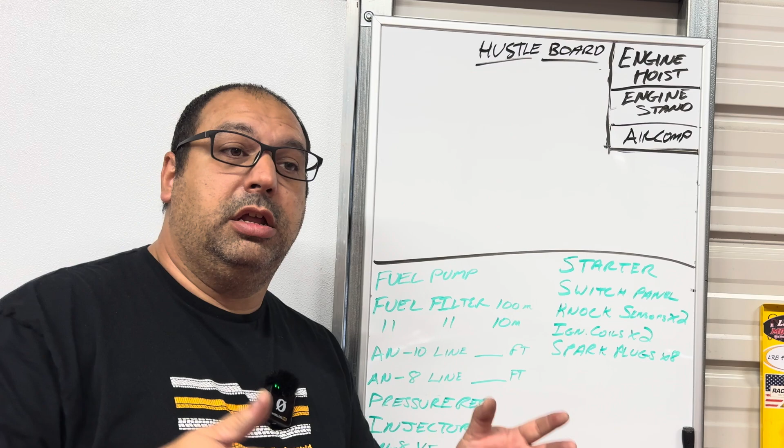I have a whole list of things I've been writing down as I go that I need to get this running. I know I need a fuel pump. I need a fuel filter before the pump and one after the pump, 100 micron and 10 micron. I don't know how much AN line I need, because I want to do -10 from the tank to the filter, and then from the filter to the pump I guess it'll be -8 just to save money, and from -8 it'll be -8 all the way up to the front.

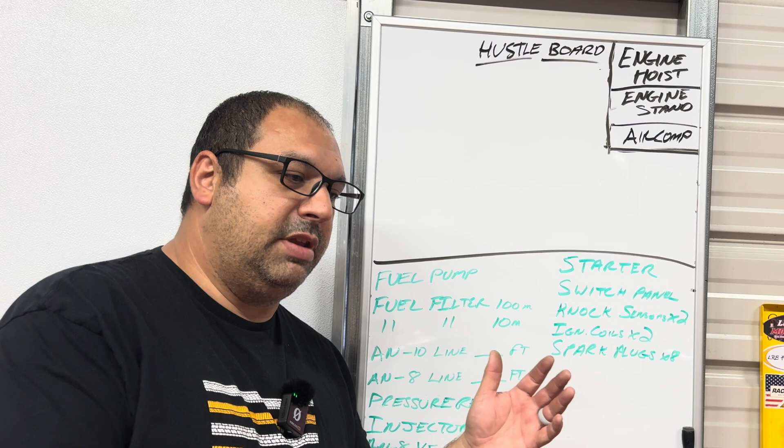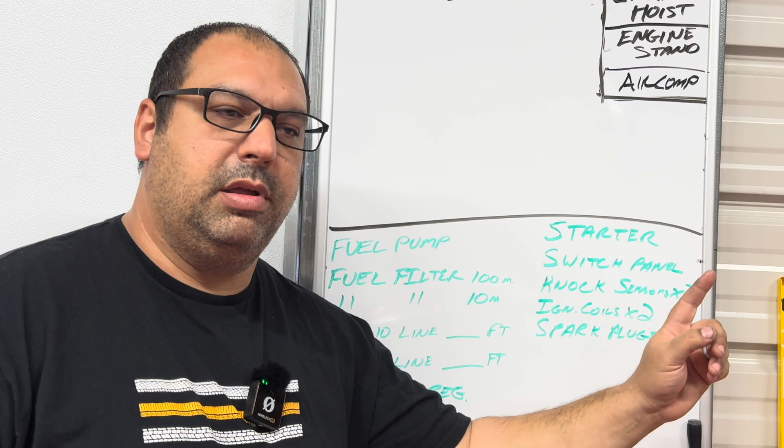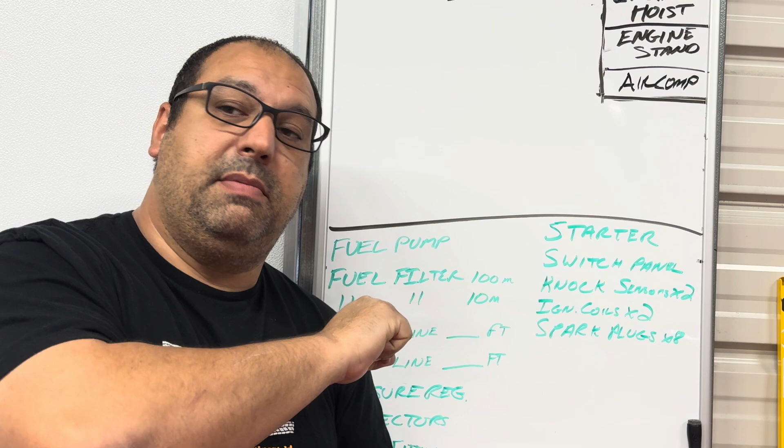The only reason why I have an AN Y fitting here is because I've looked at some of this other stuff online, and some come with fittings, some come with 90s and 45s or whatnot, but none of them come with a Y fitting. So I figured if I'm going to run fuel cell to fuel filter, 100 micron, to fuel pump, to 10 micron after the pump, and then to the regulator, I could do that 10 to 8, or I could do it all in 10. When I get to the regulator, it'll regulate like 58 PSI all the way up to the fuel rails in -8 line, so I'll do -8 from there up to the rails with the Y fitting. But from the regulator back to the tank, since I'm returning excess pressure or fuel beyond 60 or whatever, I'm going to do that in -8 as well.

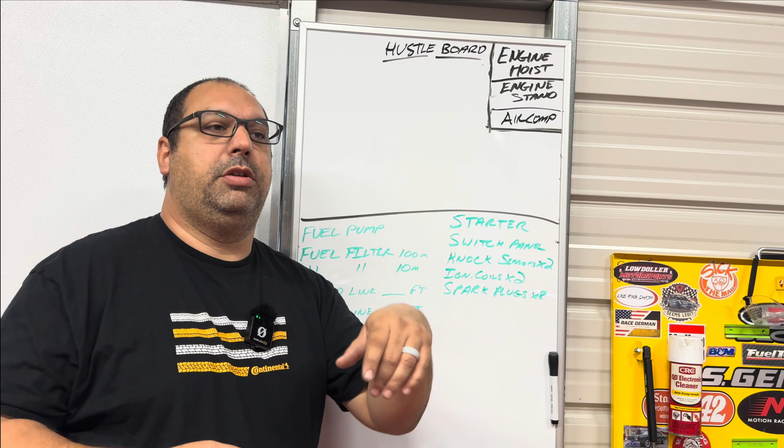Just by talking to you guys and bouncing it off somebody, I feel like I'm going to need more -8 than -10. I think what I'm going to do is take an extension cord, zip tie it up, and mock up the fuel system. But anyway, back to the list: fuel pump, fuel filters, -10, -8 fuel line.

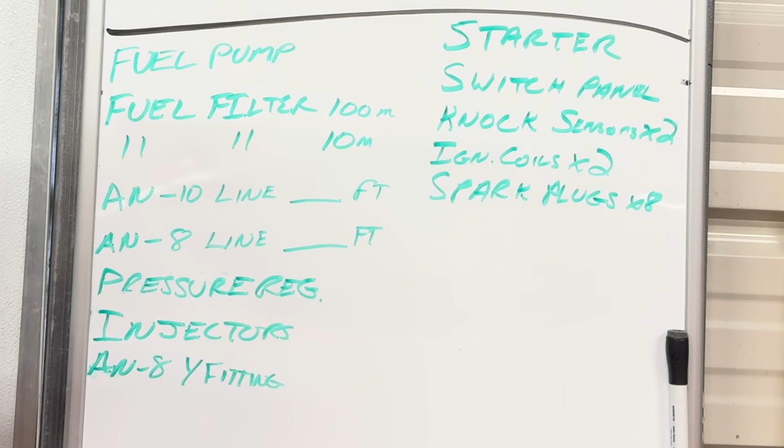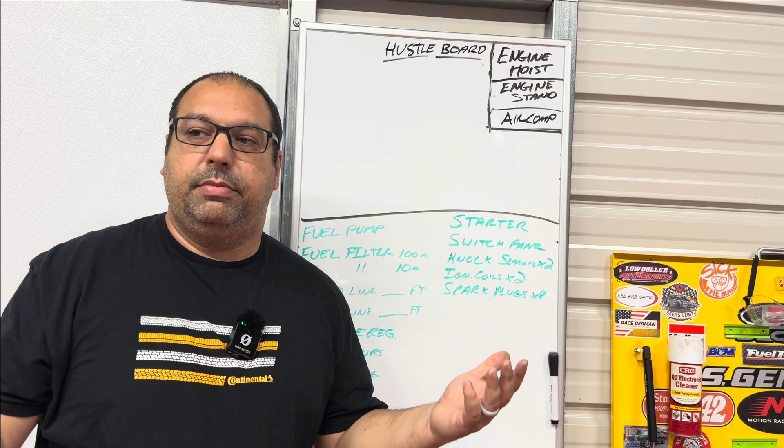I need a regulator. I need injectors because the E38 General Motors PCM that came with the Mast Motorsports LS controls kit can only run high impedance injectors, but with low impedance and the stock PCM you can't run them. So I'm going to have to get injectors.

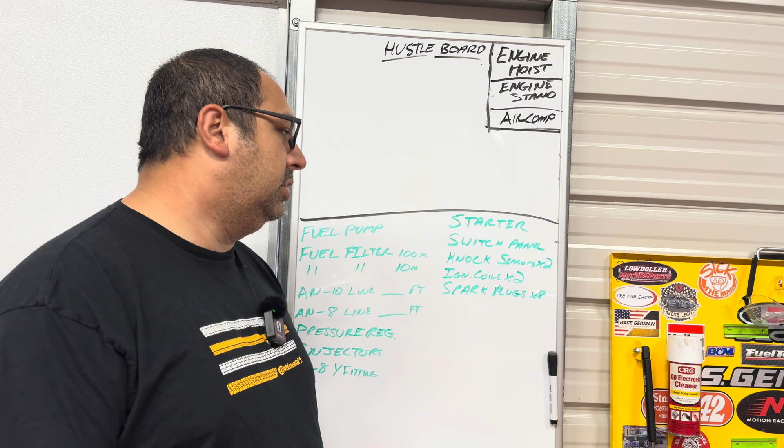I'm going to need a starter because the one I have doesn't have a solenoid on it, the starter solenoid was damaged. I need a switch panel - the ECU is going to do all the controlling and stuff, but I still want a switch panel. I need 2 knock sensors because I don't have those. I need 2 ignition coils because I have 6, you need 8, and I need 8 spark plugs. So that's all I can think of to get this thing running.

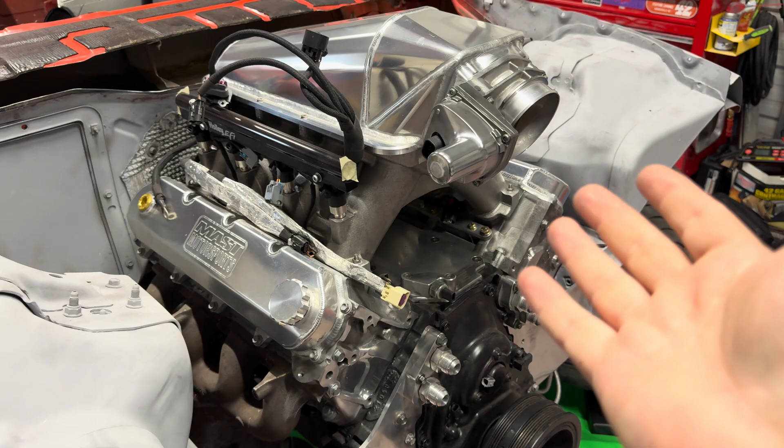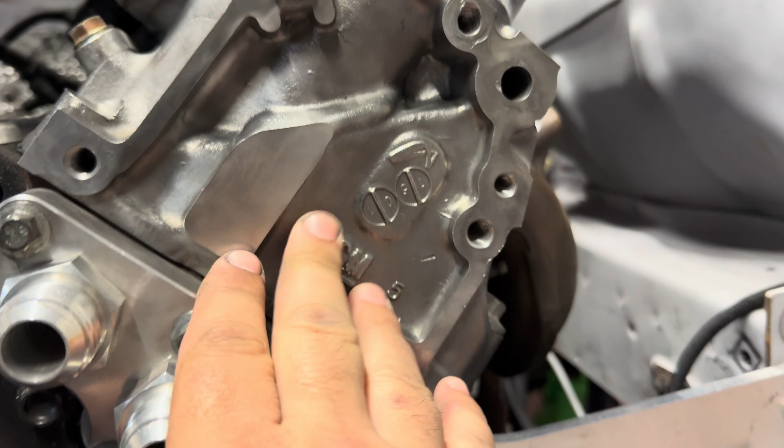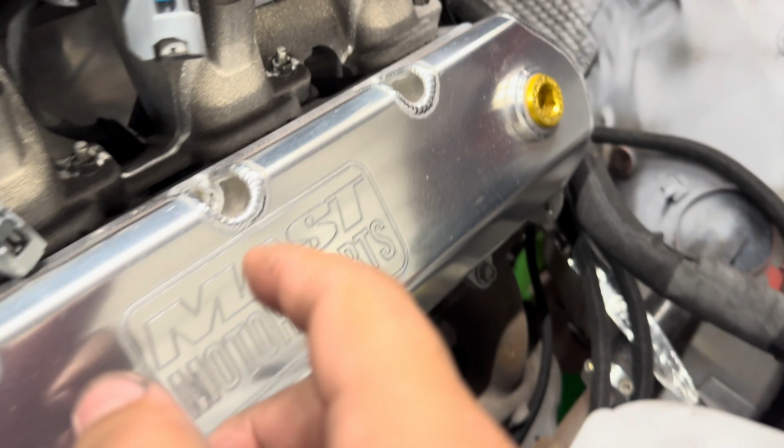As far as sensors and whatnot, I got bored the other day and got tired of the oxidized look, the aluminum was oxidized. Let me show you, it was doing that. See the little white spots everywhere? Let me see if I have another example. Yeah, the aluminum's starting to oxidize just from sitting, because like I said, there's moisture in this building.

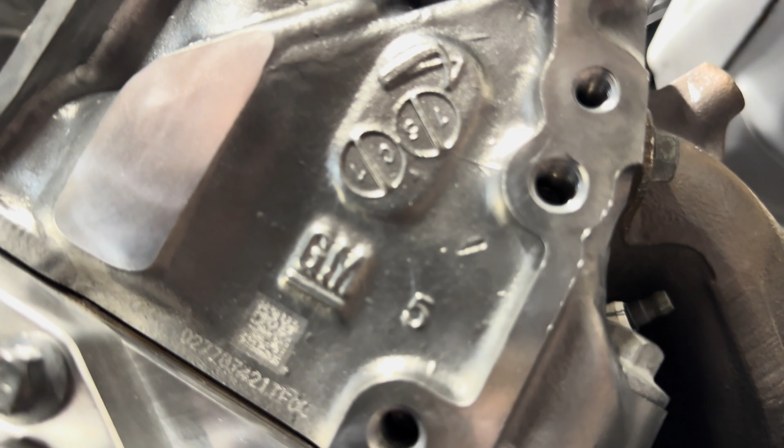So I took my time with a little Dremel and started polishing, or whatever, you see? And then I got really bored and started to polish stuff. In order to get this smooth, you have to remove all the casting dimples and stuff, and I realized quickly that takes a long time to do. With the right materials and attachments, I could do it, it would just take a long time.

So I think what I'm going to do is pause on this for now until I get bored again, and go to Harbor Freight and get a bunch of attachments for my Dremel and just blast through this. But I'd like to get at least the front of the heads the same. I don't really care about these casting marks, this weird squiggly thing, I don't know what that is. These things, I don't know what that is either.

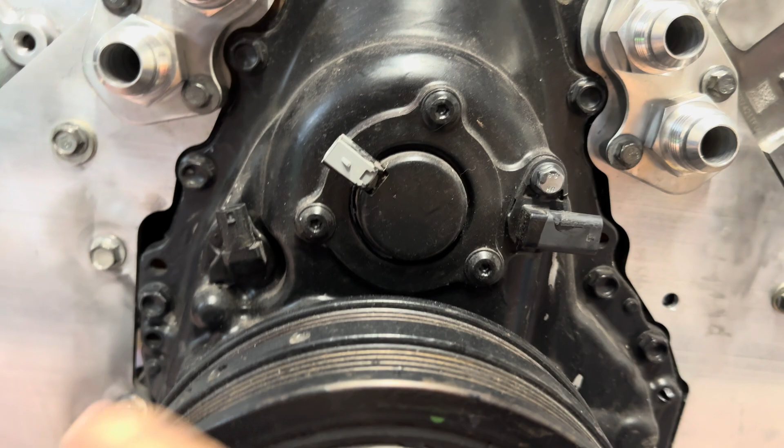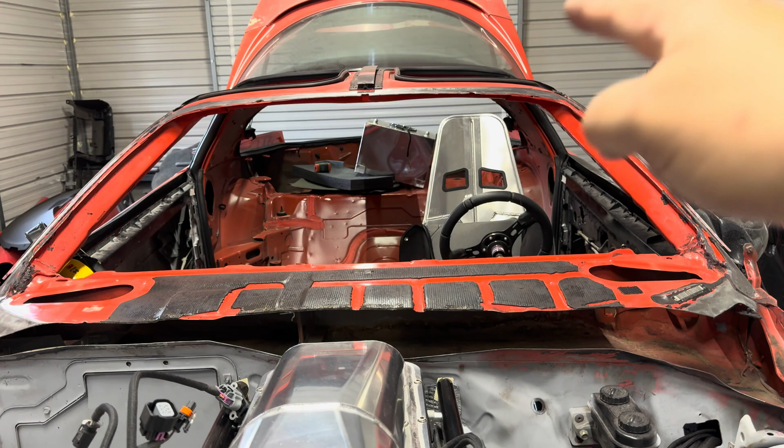I know what that is. So yeah, and then I got all the hardware cleaned up best I could. And there you go, that's what I've done. But today I have a plan for something I want to do in the back of the car with that thing, I was going to do it like this, right?

I like the height of it or whatnot, but honestly, I don't like this setup the way it is, simply because I bought these brackets, and if you go to mount these brackets, I have nothing smooth to bolt to. Nothing at all. Instead of doing all that and having the fuel cell way high up here and having to figure out how to build some kind of bulkhead, I am gonna cut the tub out.

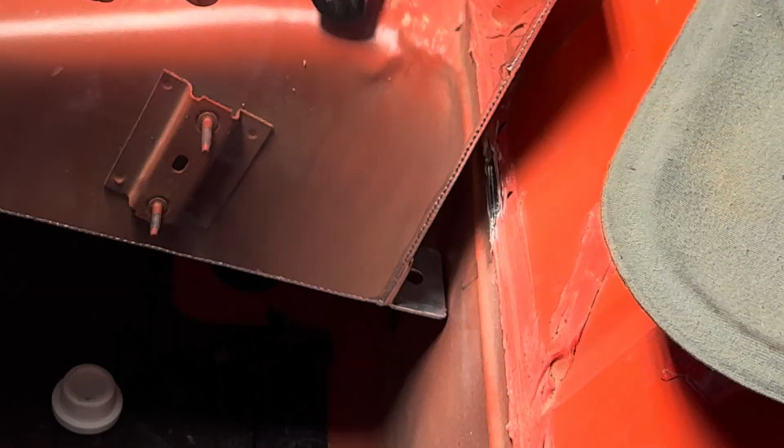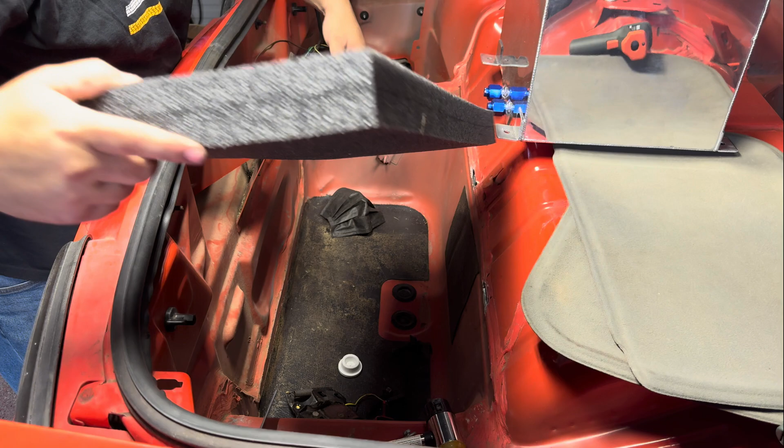You see that where it's hitting right there? I'm gonna cut the tub out, and that'll let me drop this tank basically to where the top of the tank's like this. The top of the tank's gonna sit here, right? A little bit lower than, basically it's gonna sit there.

This little oopsie here, I can fill that in with whatever, but I'm basically gonna cut right along here where Rock Solid Motorsports tells you to cut their stuff, because I have a good idea to use just their lid, their rear delete panel, and make a lid out of it.

And then to support the tank, I'm gonna run channel metal from Lowe's or whatever, from frame rail to frame rail, 2 pieces, one this way, one that way, and it'll support the tank. Bada bing, bada boom, I'm done.

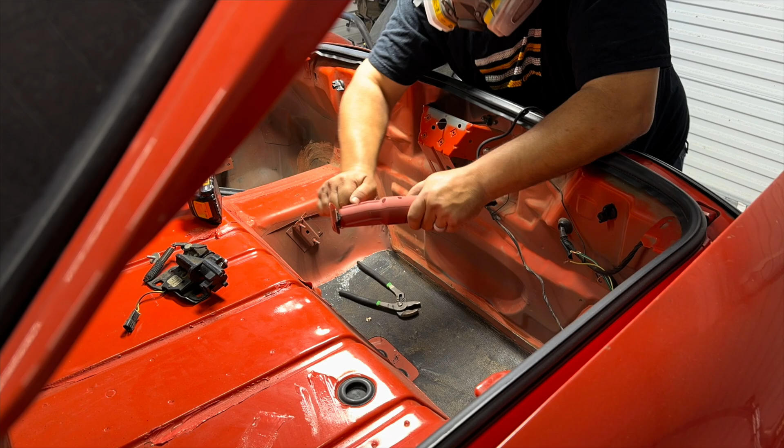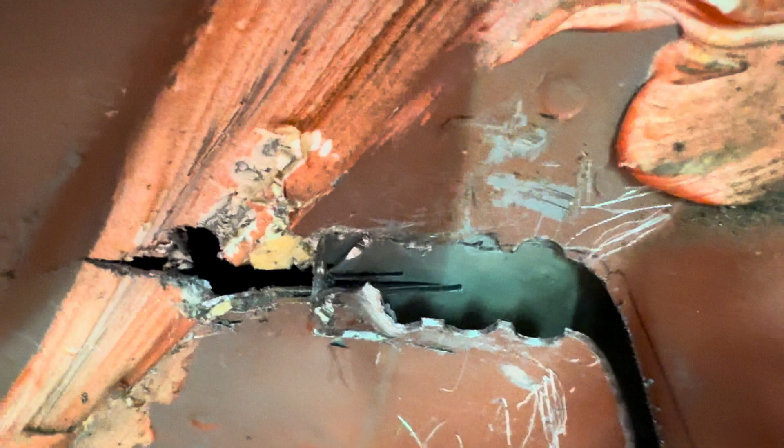All right, so the problem that I'm having, so I have my cut all the way across, right? And it looks like it's completely separated, but there's another section of metal that's attached to it. I guess this one, when it was seamed up, it had some extra stuff seamed, but this cut goes all the way through, which doesn't make sense to me. So when in doubt, cut it out.

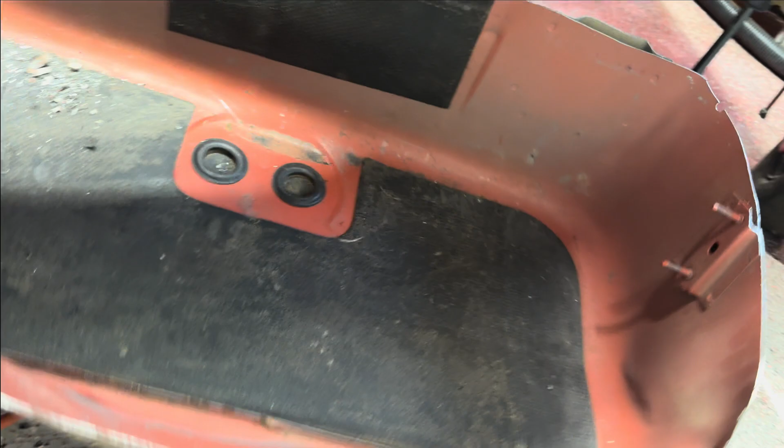What they don't tell you, see that backing plate that goes all the way across the tub? That's part of the car. See? They don't tell you on the internet. I don't care what video you watch, nobody tells you about that secondary skin part thing.

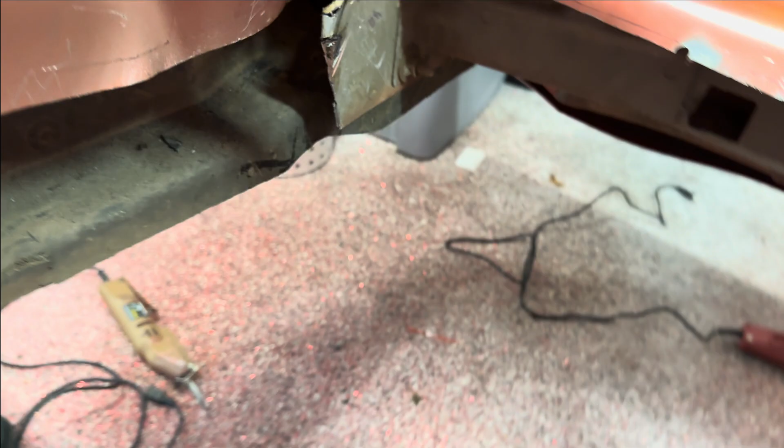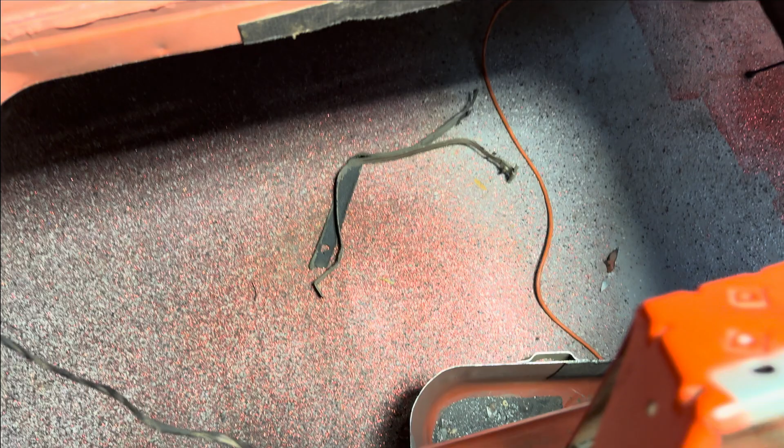So I'm telling you now, you better cut that from the bottom before you cut your tub. Because everybody makes it out to be real easy, cut and drop. Yeah, no, I don't think so. That's for people who have already turned their car into a race car. I haven't. So if you're like me, make sure you cut that plate.

So now I have plenty of room to put the fuel cell wherever I want. See that frame rail right there? Let me tighten up my spot a little bit so you can see. I'm gonna run 2 pieces of L channel all the way across to this one, that one down there, so the tank can sit right there.

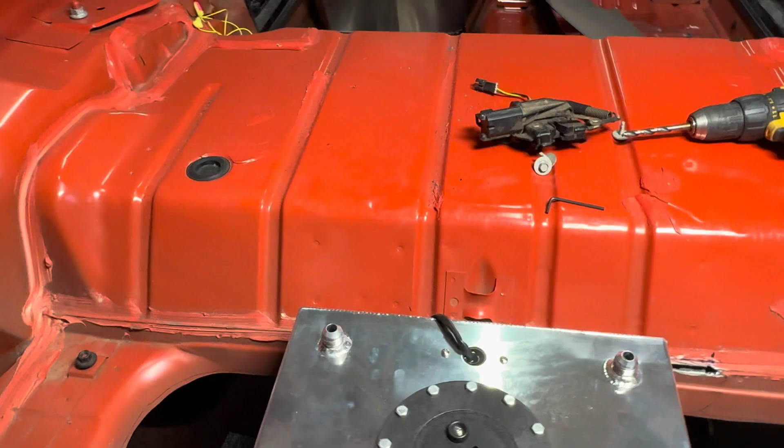Let me mock it up so you can see. Okay, so I had to find foam blocks and stuff, and basically it's gonna look like that. That's about the height that the frame rails are. So it's gonna be there.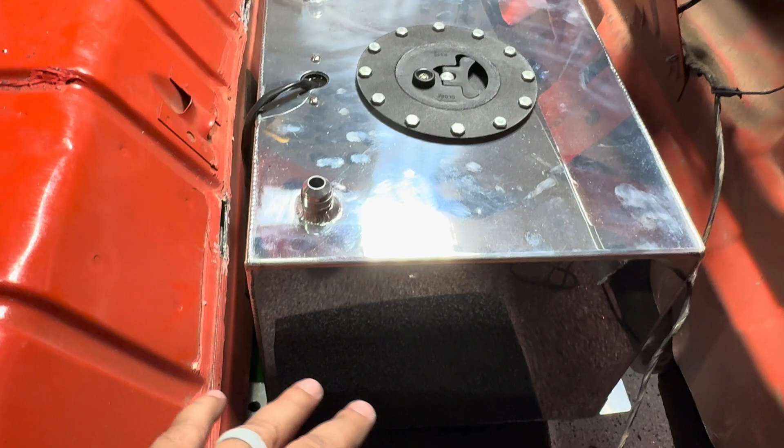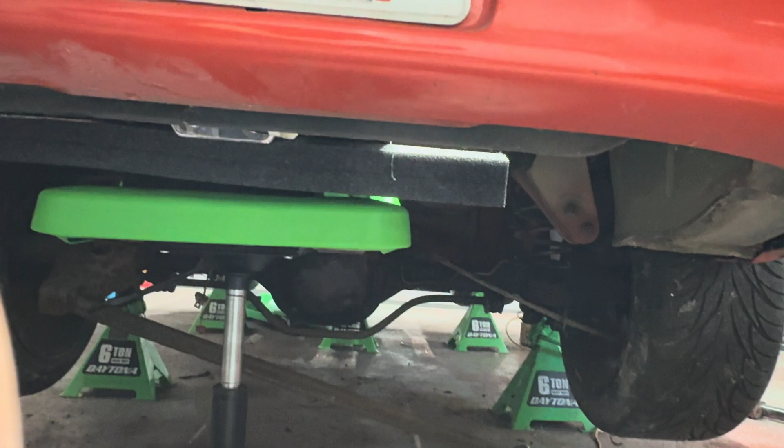And then all I have to do is build a lid, because I was gonna use the Rock Solid Motorsports one, but I would have to drop the tank so far down that if you look from the back, it would stick out. And right now it's ideal, you can barely see the sump, and it's pretty much level with the bottom of this. So that's pretty much where I want it, as low as I would want it.

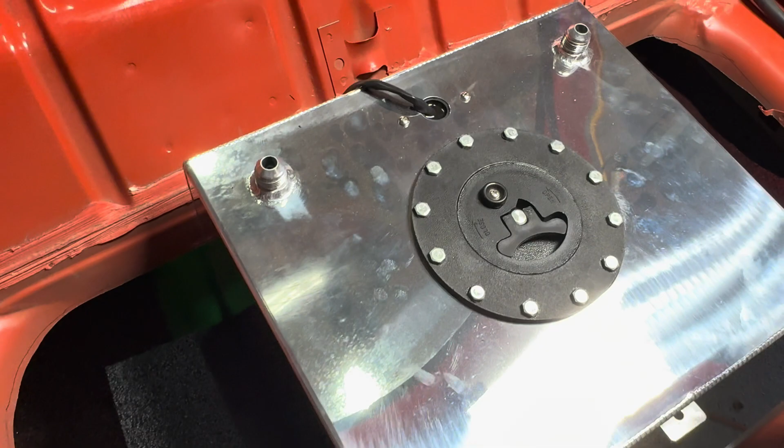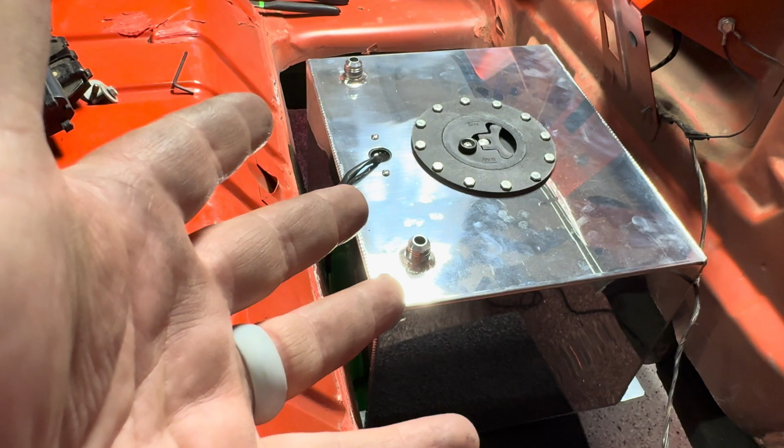That's, the frame rails is max. I don't want it any lower, because if this thing turns into a wheelie machine, I don't want to have any problems. So that's where it's gonna roughly be. I don't mind if it goes up a little bit, but I don't want it to go any further down.

So by cutting that tub out, I was able to gain the clearance I need, because this is 8 gallons. I didn't want a 10 or a 15 or anything like that, because 7 pounds per gallon, no thank you. I would rather have 8 gallons, that's enough to do a street test or whatever, because some of these courses, some of these classes, you have to drive a 30-minute cruise around a track with a pace car, and that'll be more than enough to do 30 minutes.

But overall, I'm really happy with the way it turned out. Now, like I said, I'm not a fan of that. I will clean that up off camera or whatever. But that's cool, that's a good look, huh?

I said I was gonna cut on the car, but man, cutting that out definitely made a big difference. Helped me fit that in there, so. There's the fuel cell where it's gonna go.

I said I wanted to work on the car, right? Well, I had a lot of fun. As much of a pain in the butt that was to do, I had a lot of fun working on the car and modifying it and doing what I had to do to get the fuel cell mounted and make it more of a race car.

So we have a game plan on the hustle board. Now I know exactly what I need to get, and I'll start buying them piece by piece and get this fuel system done, because once that fuel system's done, all I gotta do is wire up the switch panel, give it power from a power distribution block from a battery, and boom, it should start right up.